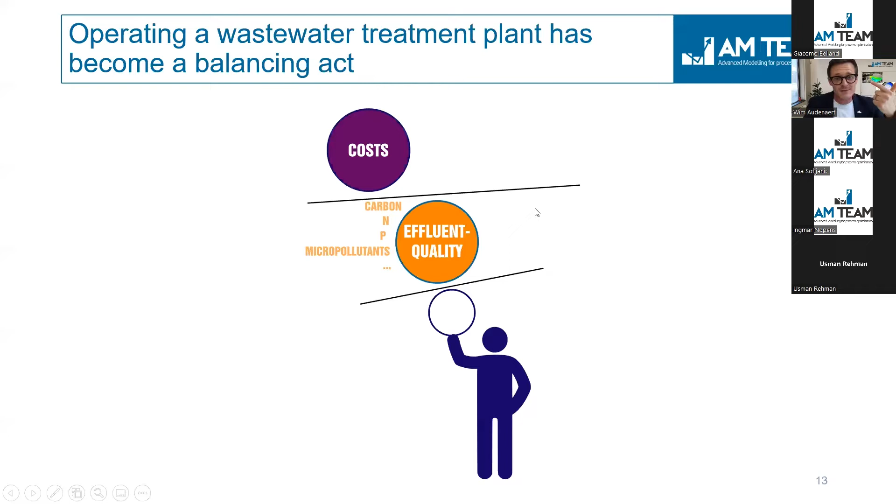You have to balance it with costs. And now we have this third dimension of N2O or climate impact. These three conflict. Not a single plant in the world is a perfect plant with all of them in balance. So the cheapest treatment with limited climate impact and the best effluent quality, it doesn't exist. You really have to balance it. And this makes operating a wastewater treatment plant today a bit more complex, and it makes it a balancing act.

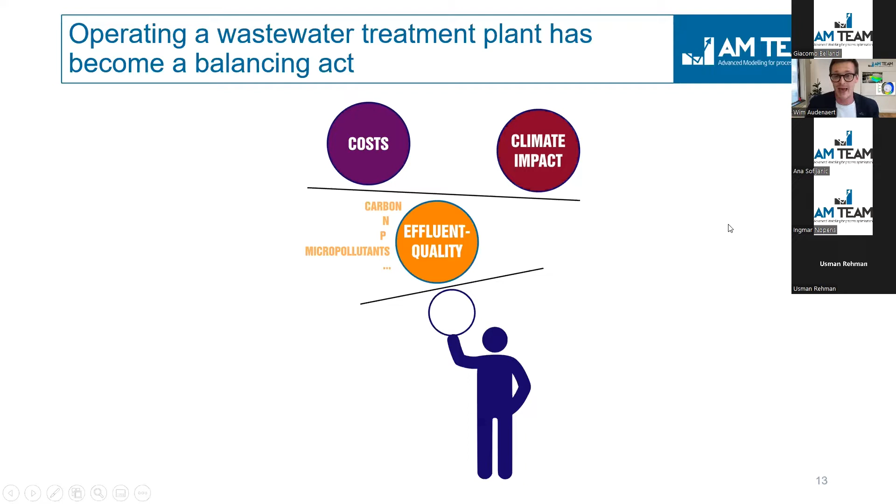So why is N2O important? Well, I should probably not introduce this. N2O is approximately 300 times bigger, let's say, when it comes to climate impact compared to CO2. So this delivers some interesting key figures. Wastewater treatment, if you look at the global carbon emissions, accounts for approximately 3% of that. If you only look at N2O, it is a big fraction of this.

And in fact, N2O, including the drinking water and reuse industry, accounts for almost 30% of the industry emissions. So it's a big issue, right, if we want to lower our footprint. N2O can increase the wastewater treatment carbon footprint by up to 80%. There are several papers on that. Where is it coming from? I think most of you are also familiar with it. It's coming mainly from the biology. There are a couple of other sources, but anoxic zones, aerobic zones, biological nutrient removal.

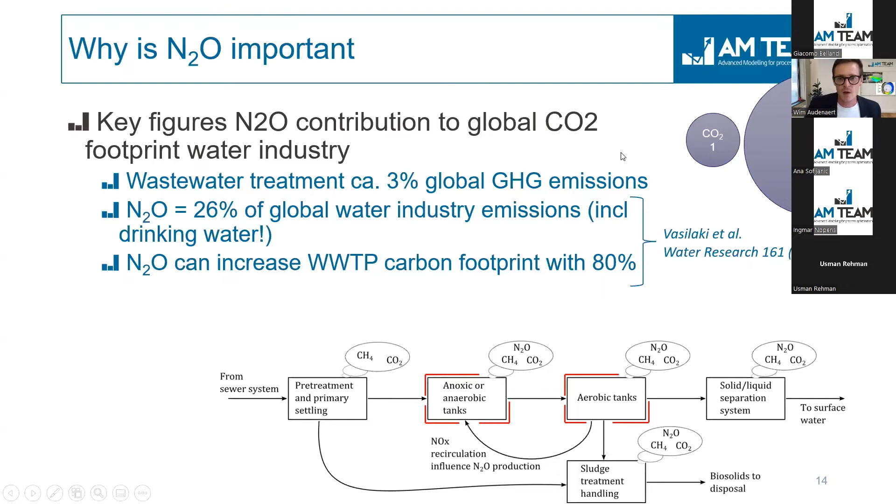What are the questions then? If you go back to this poll, what are the main questions in the market? We have broken it down into two big parts. The first one is, how good or how bad are we doing? How severe is the N2O problem? That's assessment. Once you have done an assessment, you can mitigate. What are the questions with assessment? Well, how is the N2O emission at my plants? Which ones are the hotspots? How do I actually prioritize? And how do I adequately do an assessment of this N2O emission? Because it's very complex and it's not easy. We will come back to that in this webinar.

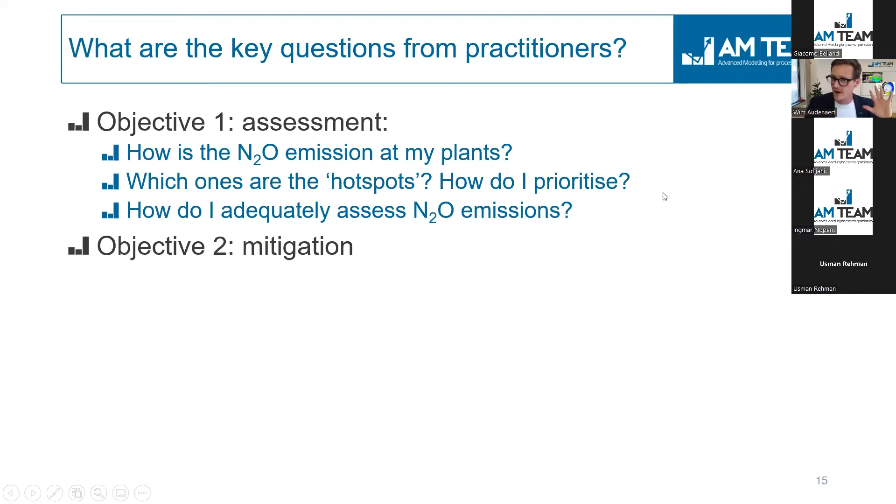Very important questions. When you look at mitigation, well, what are the strategies on the market that exist to mitigate? Probably it's very plant specific. So the question is, what is most effective for my plant? And how do I mitigate N2O without compromising effluent quality? Just remember this balancing act. And what are the generic learnings every utility can apply over and over again? Many questions we are looking for.

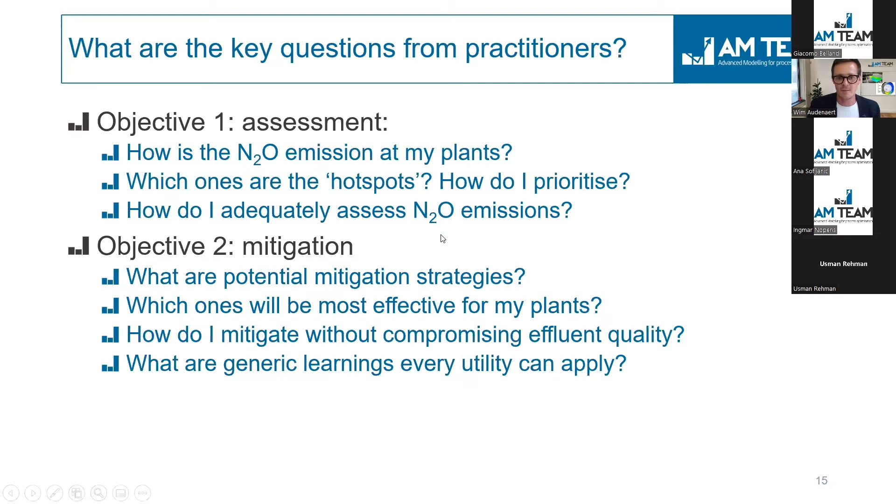A recent post by Watercare Services, which is a utility in New Zealand. This is a post from last week on their LinkedIn channel. N2O is not a laughing matter, they said, right? But if you read a bit more in the post, it's all about the challenge. It's really, how do we get the answers? How do we adequately measure it? How do we find the answers we need?

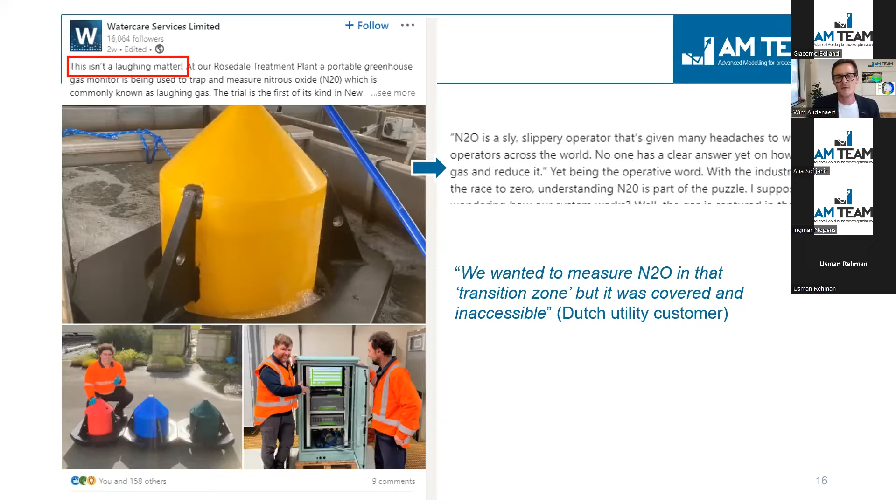We were talking with a Dutch utility customer last week, and they said, we want to measure N2O in that transition zone, for example, a zone between an aerobic part and an anoxic part, but it was covered and inaccessible for a sensor. There are really many limitations and black boxes when it comes to N2O assessments. So with this introduction, I will give the floor to Ingmar. He will be introducing the N2O topic more.

Okay, thank you, Wim. So indeed, I will go a bit further on where exactly the nitrous oxide is produced. Wim already highlighted that you have different microorganisms that are doing different conversions. And usually it's actually under, let's say, extreme conditions. What do I mean by that? When there's actually a metabolic imbalance. So for example, if you have high levels of oxygen or low levels of oxygen or high levels of nitrite or ammonia, that's typically when the pathways for N2O production are triggered. And what we will show here is that this can happen and actually happens in most of the bioreactors.

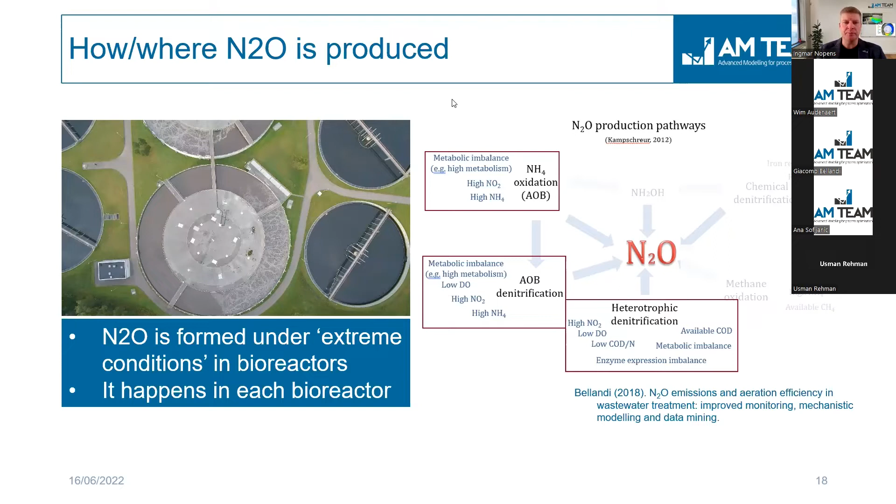So what is driving the N2O production? Well, you have several parts that have an impact on that. First of all, you have your influent that has a certain load, a certain quality, and a certain quantity, a certain flow rate, which is not fixed, it's varying in time. Then you also have the type of the reactor. You can have different types of reactors, different processes, and different process designs. Also, that will have a different impact on the N2O production. And then you have the operation, which is typically going to be, for example, set points of oxygen, etc., or cascade controllers. So all these things will have an impact on the amount of N2O that would be produced.

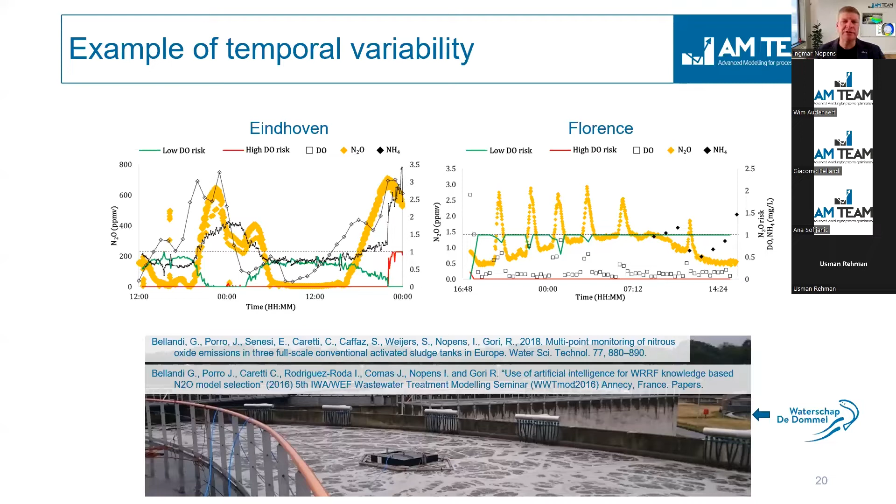So let's have a look at some evidence of this temporal variability. What we see here are some pictures from two papers, and the references are shown below, where measurements of nitrous oxide were performed during the course of one day. You can clearly see, N2O here is represented by the yellow symbols, that it's not constant in time, it's varying in time. But also you cannot really see very clear patterns. There are some patterns in there, but it's definitely not going to be completely fixed.

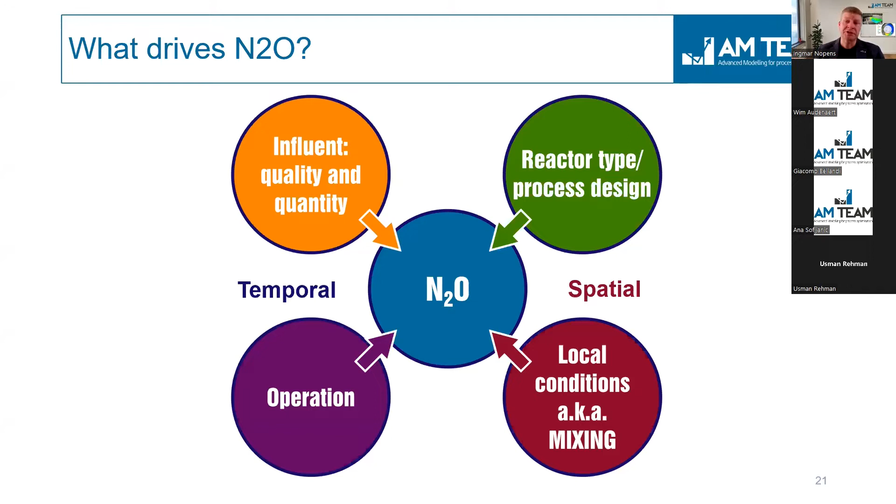So one thing that we want to also add to this, next to the temporal factor, is actually the spatial factor. We have seen, or talked about, these metabolic imbalances caused by some extreme conditions. And actually the fact that a bioreactor is not a completely stirred tank reactor, as we will show later, means you can have some of these extreme conditions even in locations where you don't expect it. So we believe that mixing is also a very important topic.

So that brings us to a first key point of this webinar, that basically due to this complexity, it is really hard to assess and to effectively mitigate N2O emissions. We have different factors that have an impact: the influent, the operation, the system type, and the mixing. So this also means that the assessment and the mitigation will also be highly plant dependent.

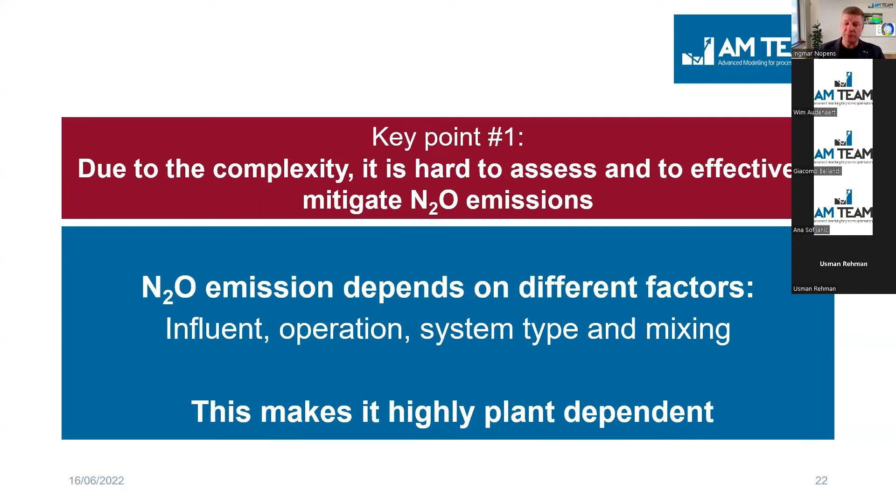Yeah, thank you, Ingmar. Indeed. So apart from all the other things Ingmar mentioned, one of the things was the mixing or the local gradients. So let us dig deeper a bit into the gradients in the bioreactor.

We will start with a very simple example of a coffee cup where you are pouring milk into coffee, and you would expect that it will actually mix immediately. But you know that if you don't stir it very well, it takes much more time to actually completely mix. Which means the gradients, even at that small scale, exist. And by the gradients, we mean the difference between concentrations across the whole reactor system.

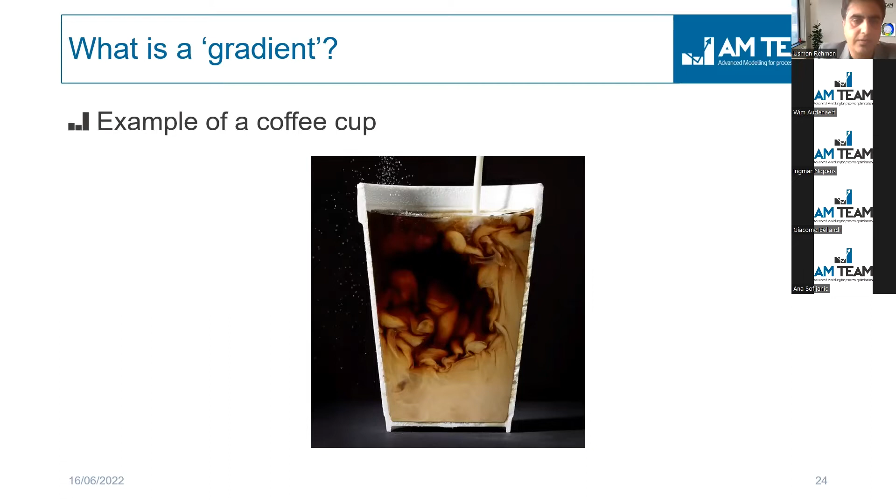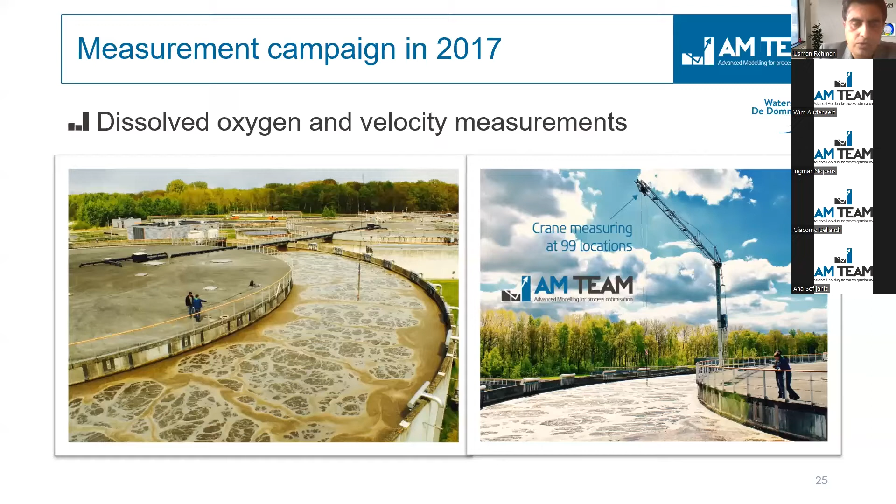What we did in order to confirm this, in 2017, we did a measurement campaign on a wastewater treatment facility in Netherlands, in Eindhoven, using a crane with multiple sensors attached, and we went deep into the reactor to measure dissolved oxygen and also other measurements. But if we go forward in the next slide, we will show how it looked like.

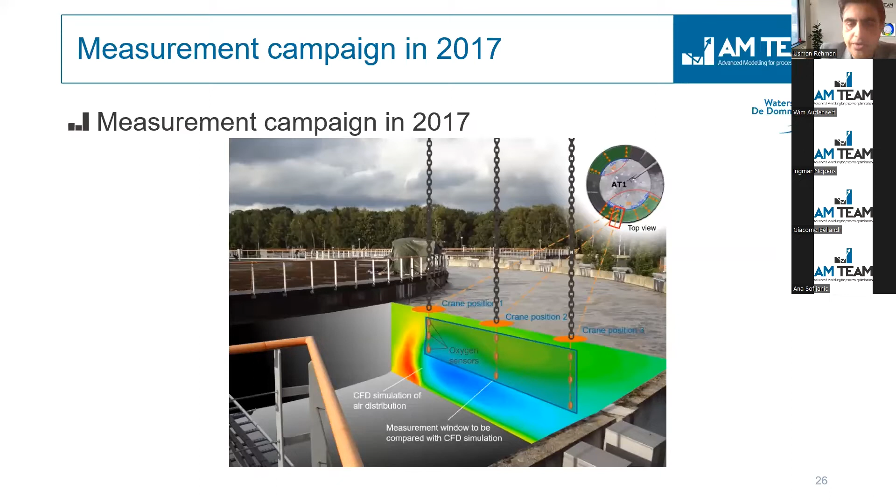So we attached several sensors with the crane, and we went deep inside the reactor, and not only deep, but we also measured across the whole width of the bioreactor. And we observed that actually dissolved oxygen is not really constant, but it's very varying, and it means that there are really gradients existing in such a big bioreactor, even in the zone where the aeration was really happening.

So in this graph, there are two graphs which show two different locations in the bioreactor. On the left side, you see dissolved oxygen across the depth of the bioreactor and the width. The blue color shows the low dissolved oxygen, and the red or green colors show the higher dissolved oxygen concentrations. You can see clearly that there's a 40% difference between the top and the bottom dissolved oxygen concentrations, which is a big gradient at the same location.

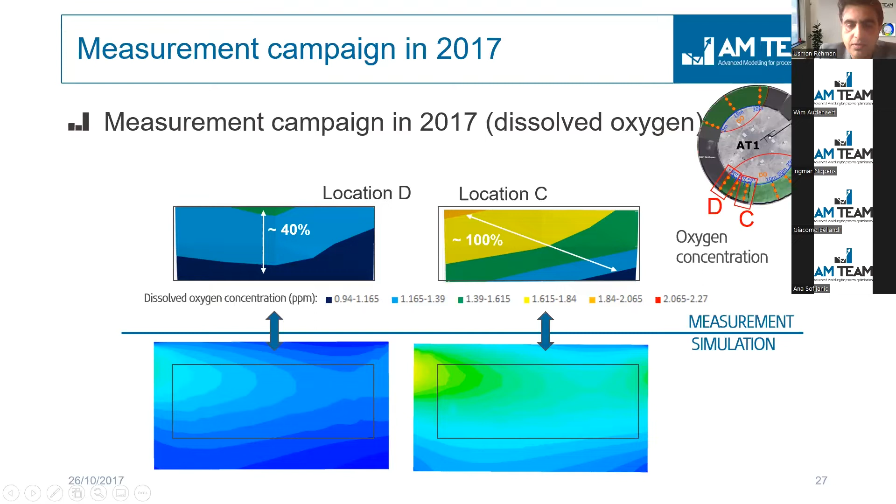And then at location C, it's not only along the depth, but also along the width of the bioreactor, so the diagonal. Oxygen almost gets doubled going from right to left in the bioreactor. This was confirmed with CFD simulations, which showed almost similar gradients arising because of the hydrodynamics of the system in the bioreactor.

And this is not the case only for one type of bioreactor, but this is almost the case for all types of bioreactors.

So it means that it really depends on your system. It really depends on your operations, how you are really operating your bioreactors.

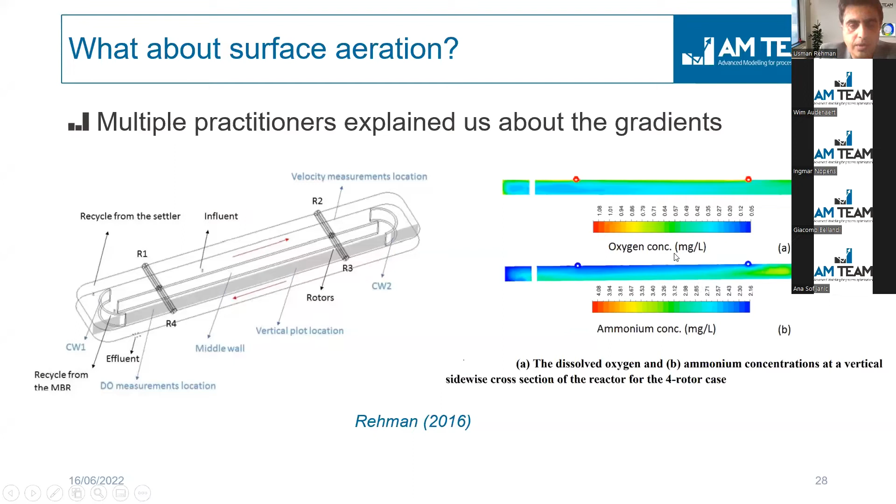We have also done some off-gas measurements to further confirm this. Our colleague, Dr. Giacomo Bellandi, actually did the measurement campaigns in two different plants in Italy, one in Florence and one in Rome. In both conditions, what we did was put gas hoods across the length of the bioreactor and also along the width of the bioreactor, to see if the reaction is happening only along the length of the reactor, or also along the width.

Normally what you would expect is that your influent is coming in from the left and going to the right, continuously causing a reaction, and you would not expect a lot of variation radially or along the width of the bioreactor. But what we observed in both cases was that there was always a difference between location 1 and 2, or location 3 and 4, location 5 or 6, in both cases.

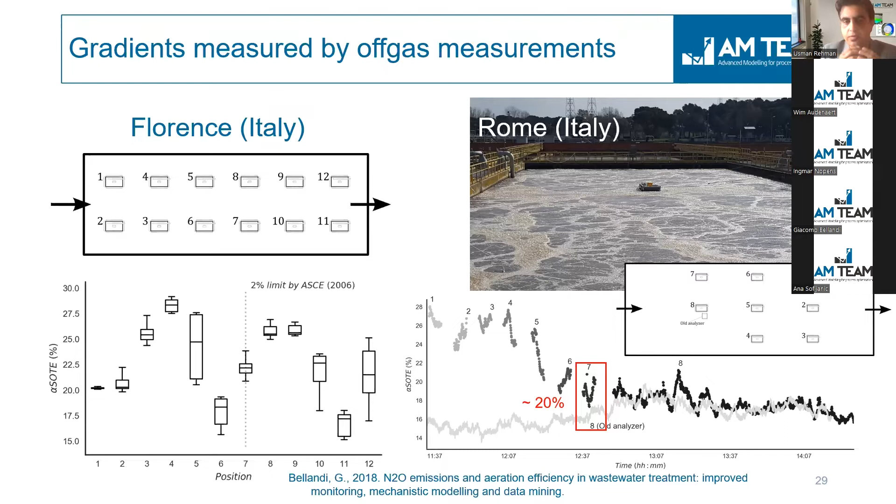For example, in the case of Rome, there was almost a 20% difference between the oxygen efficiency of location 7 and 8, which just tells you that there are actually differences when it comes to dissolved oxygen. Similarly, other variables will eventually have variations in the system.

So this makes things a bit more tricky, because what does it tell you? That we should be asking, where should we be placing our sensors? And once you have put your sensors in a certain location, how would you interpret it? Are you putting your sensor in a good location where you expect a measurement that's representative of the whole system? If not, how would you interpret it, and how would you derive conclusions from your measurements?

But what is more certain is that every bioreactor has gradients. We got to know how we can quantify the gradients, and how we can measure the impact of those gradients on the performance of the bioreactor. It actually varies from one plant to the other, and it also varies with how much flow is coming in and how much aeration you are putting in. So it's really a plant-dependent feature of a bioreactor.

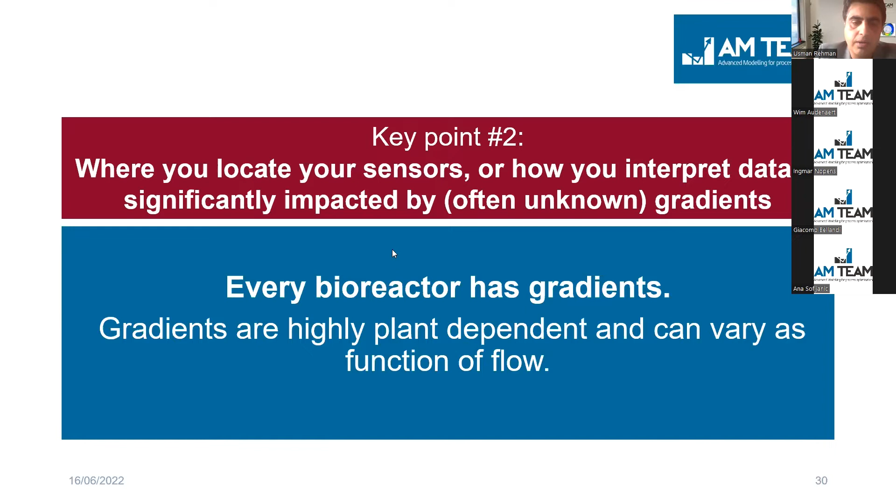So one of the solutions is to look at the mixing, which is about the hydrodynamics, about how efficiently you are mixing your system. But how can you really quantify that? Only by actually connecting it with the biological performance. And that's what we'll try to do in the CFD biokinetic model.

Usman, before we go to this part, we can actually devote some time to questions, because some questions came in. Sure, so Ana, can you maybe read this question? You're still on mute, Ana. Classical.

Thanks, Wim. The first question is, what about N2O from secondary settlers? Is there any evidence of this? We've answered yes, there are certainly studies that have proven there is a small amount of N2O production in settlers, in secondary settlers.

Yeah, and there was one question I have also seen, Ana, and maybe I will go to Giacomo. Which type of sensors did you use in these Italian plants? Okay.

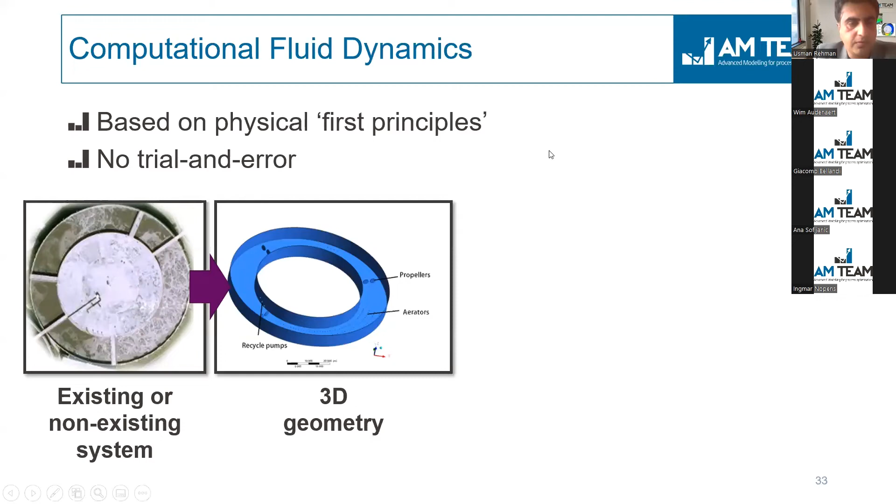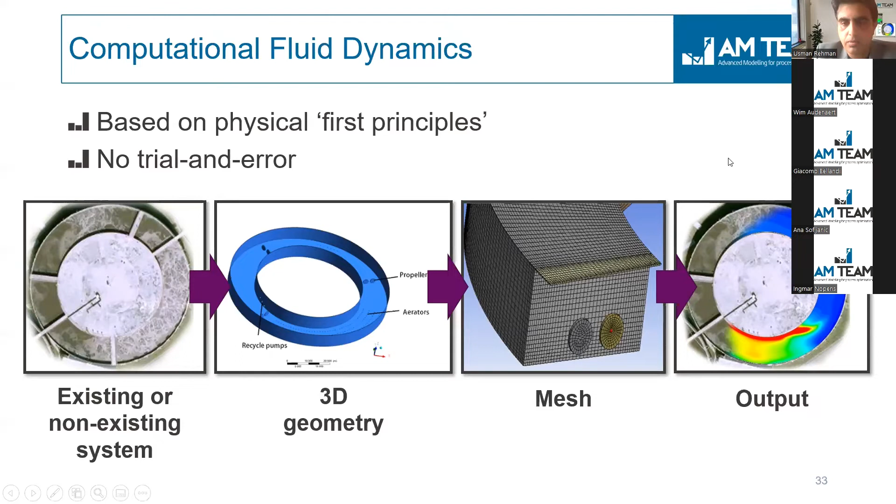We then transform this into very small volumes, which we call a mesh, where we solve all the equations. Based on that, we model it and get a nice output, normally in 3D, meaning you can see it along the width, the depth, and any dimension, as a function of your variables.

But the real power of such a tool comes when you run different what-if scenarios, which is very important given we want to figure out the best mitigation strategy for N2O. You can run multiple scenarios—for example, change your aerator configuration and see what happens. You get a new output, compare it, and assess which is the better design amongst all the what-if scenarios.

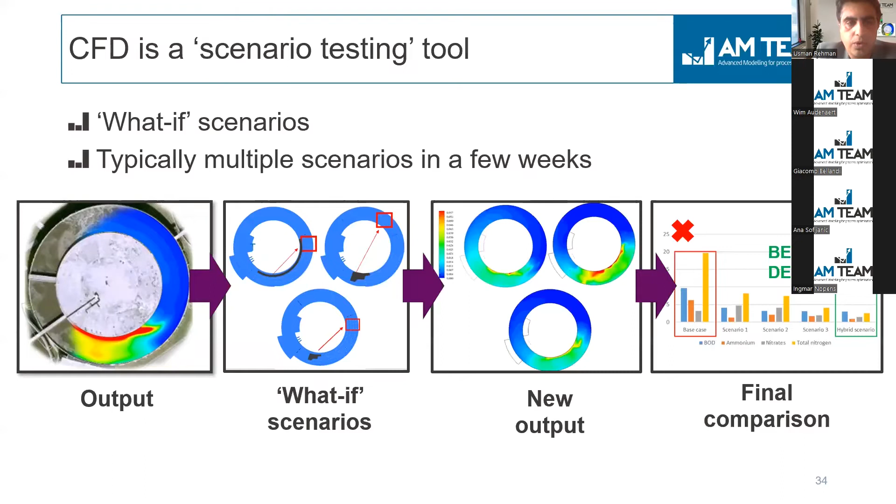So this is a basic understanding of how CFD works. But what we actually do now, to really get to the depths of the N2O emissions problem, is add kinetics into it. This kinetics comes from the IWA scientific reports, which are very famous and widely used in the industry—activated sludge models, ASM1, etc.

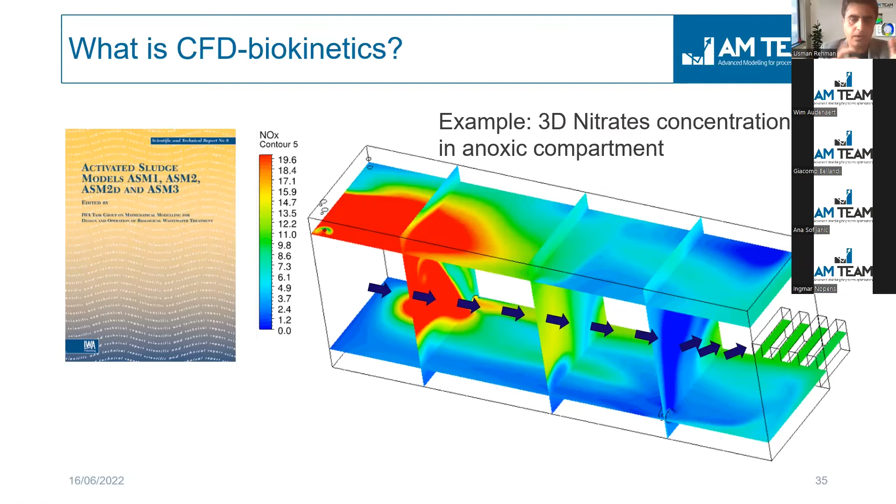By using CFD and kinetics together, you can understand the impact of your design on the performance of your biological system, and then run scenarios by moving your impeller or mixer somewhere else to see if it actually improves your system or not. Okay, so that was me. I think now it goes to Ingmar.

Thank you, Usman. So what else can we learn from these CFD models coupled with kinetics? We've already seen that you can estimate local concentrations of all the state variables in the ASM models, which allows you to evaluate effluent quality, but also energy optimization—for example, if you play with the airflow rate, you can run different scenarios. But as Wim already pointed out, there's a lot of criteria.

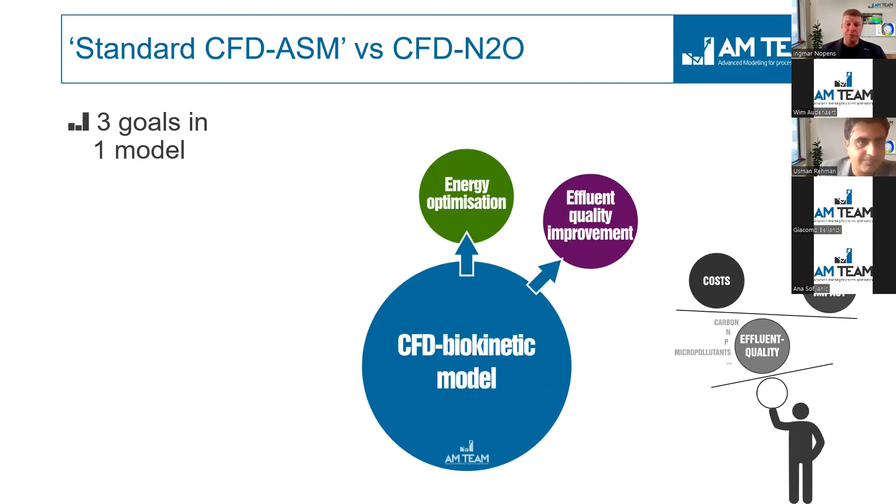It's really a multi-criteria problem, which means that when we add N2O and its mechanisms on top of this—if that is the primary objective—you also get insight into both energy optimization and effluent quality, and can be sure these are maintained. So it's like killing three birds with one stone. Moreover, it's like a 3D X-ray of your system, turning it from a black box into more of a gray box model, letting you see what's really happening under the surface.

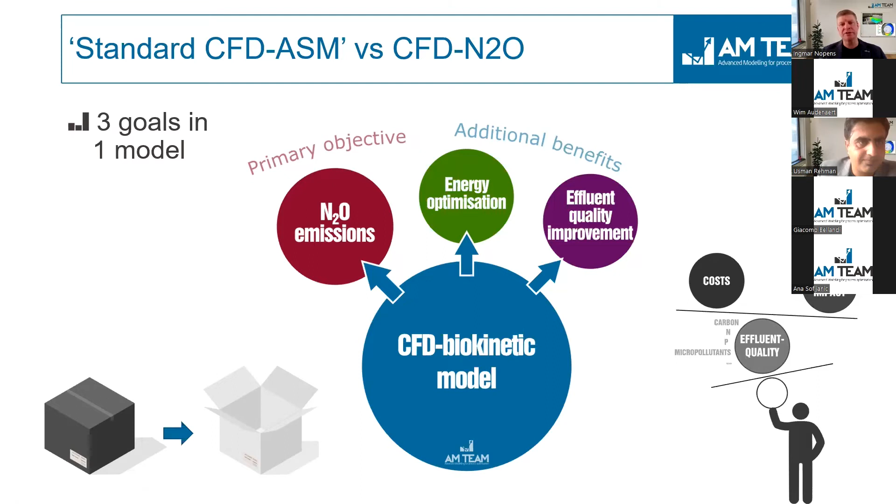Now, a little bit on N2O kinetics—not going into too much detail. Obviously, they are not present in the traditional ASM models published earlier, as mentioned in the STR. But model extensions have been developed over the last decades, putting in pathways and calibrating typically at lab scale. So what we did is take the most important pathways of these model extensions and add them to the biokinetic model, both in terms of stoichiometry and process rates.

That allows you to make local predictions of all the relevant species that have an impact on the generation of N2O, and of the N2O concentration itself. If new kinetics are developed, they can easily be added, just like adding more mechanisms and species in a Gujer matrix, as we're typically familiar with.

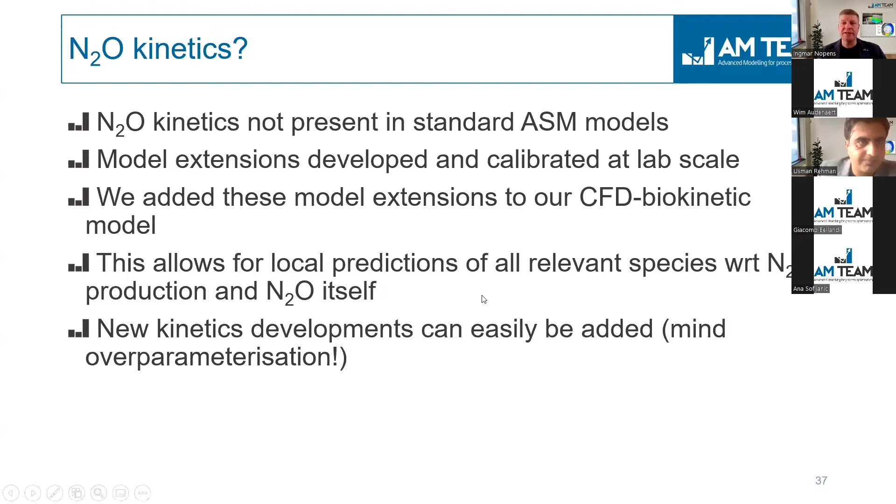One thing I'd like to stress is that you should also mind not over-parameterizing your model. You can add a lot of mechanisms, but at some point, if you have limited data available, it becomes very difficult to calibrate those models.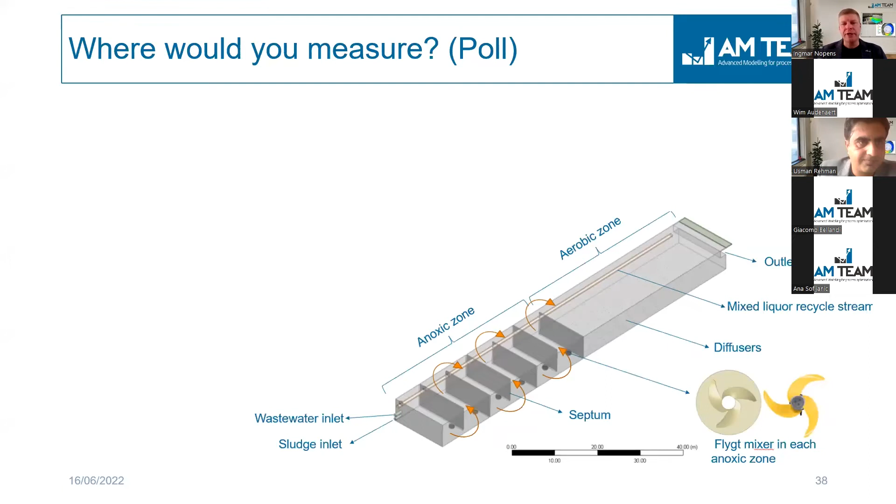The poll question is, where would you actually start measuring? Would you measure at the start of the anoxic zone, at the end of the anoxic zone, or in the aerobic zone? Would you have a preference on how you would design your measurement campaign? You also have the option of all of these locations, or 'I have no idea' - that's also a fair answer.

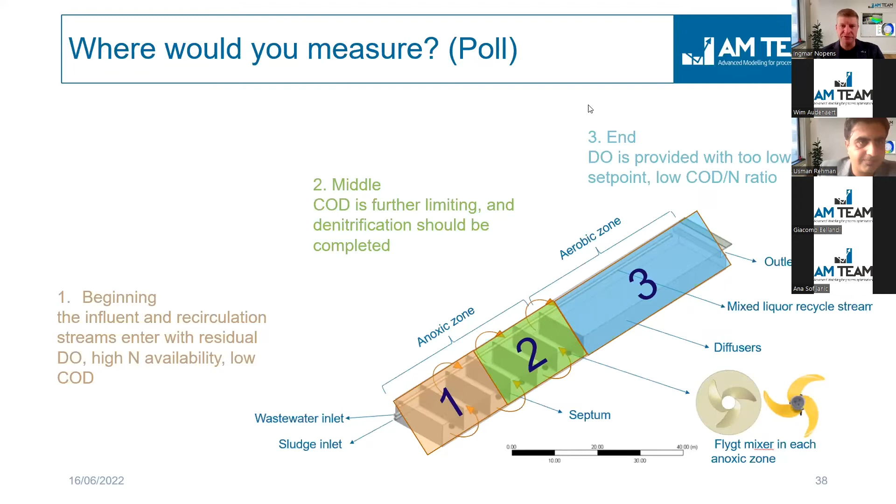Okay, let's have a look at the results. So the winner is all of these locations - that's obviously always the conservative or safe option, because then you will get to know everything. But interestingly, the others, like the aerobic zone, are also quite popular, and then at the end of the anoxic zone.

Let's continue and give a little insight into what actually comes out of this model. Here you can see the N2O production rate in the different zones. We are now looking at the top view of the reactor, like a horizontal slice. Left is the anoxic zone and right is the aerobic zone. The base case is a base case with a certain airflow rate.

What we can see is that in the anoxic zone there's not too much going on with respect to N2O production. In the aerobic zone it's also fairly limited, and it's actually at the end of the anoxic zone where we observe quite a bit of N2O production. The reason, which you cannot see from here, is because there's a backflow of oxygen from the aeration zone into the anoxic zone. So clearly a design issue is causing this.

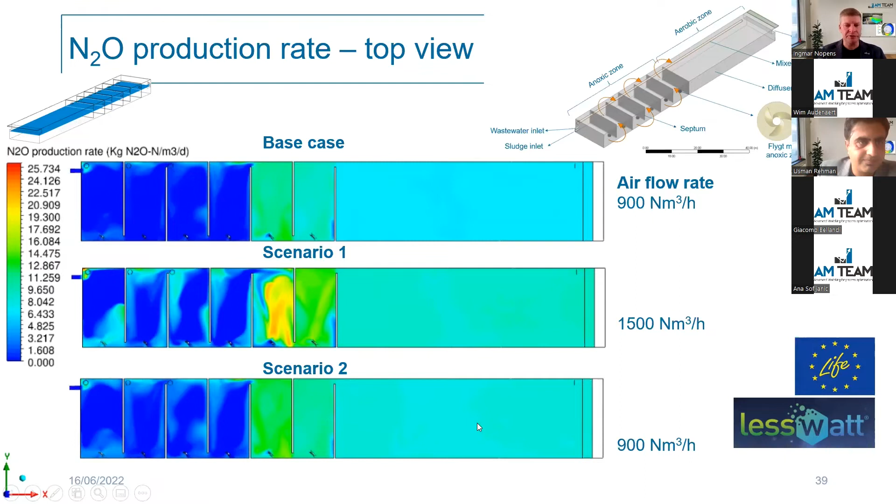In the middle figure, you can see a different scenario where the airflow rate has been increased in the aerobic zone. You can see that this further emphasizes or increases the N2O production in the anoxic zone. The lower figure is again at the same airflow rate, but now at a different load, illustrating that the load also has an impact on the N2O production.

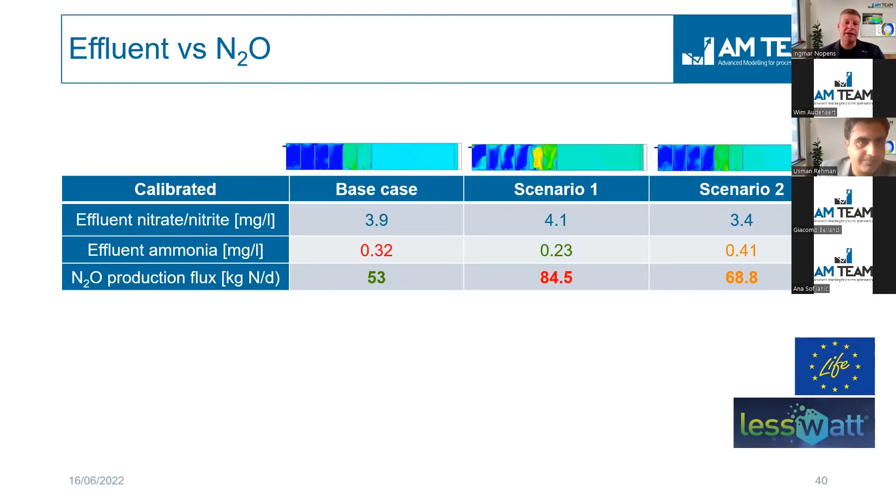From these simulations, you get observations of not only the N2O, which I discussed now, but also you can see, for example when you reduce the aeration rate, what the impact is on the effluent ammonia, to keep an eye on that, and also on the nitrate concentration. You can see that these can be very different in terms of N2O production, even if your effluent is not really affected by the changes you have made.

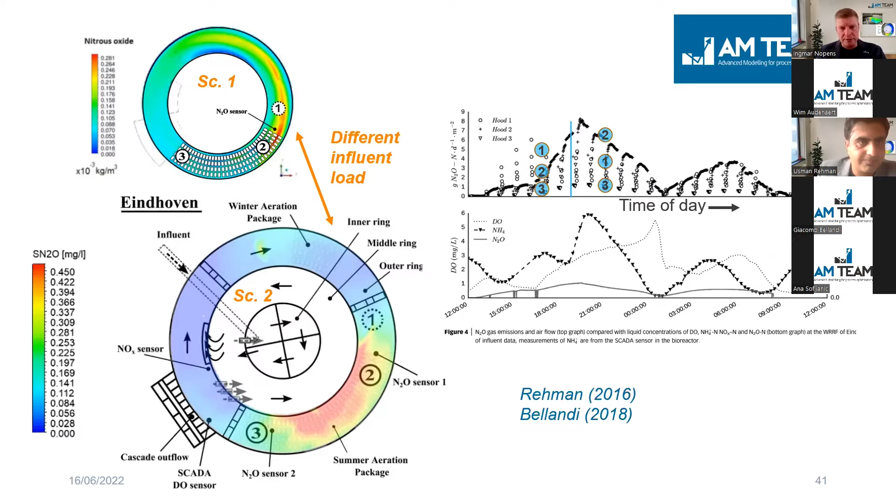So the next slide brings us to the third key point: the CFD with the integrated kinetic model, including the N2O kinetics, is a powerful assessment tool. You can observe or evaluate where in your reactor and to what extent N2O is being produced, and it could also help point you in the direction of mitigation strategies. The CFD biokinetics visualizes the concentrations in 3D as a function of the plant design and operational conditions. It's, as I said, kind of an X-ray of your system.

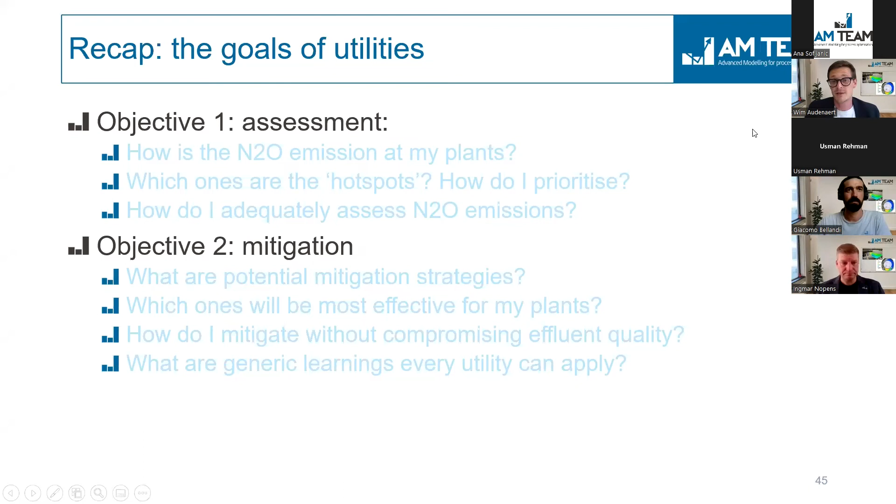Well, if we talk about the assessment stage, many utilities worldwide are currently doing that because it's important. You want to map the flux or the mass of N2O in your plant under various conditions. Many people are now engaging in measurement campaigns, and definitely there, if you look at this, probably this tool can help a lot with deciding where to measure, how long to measure, where to put the sensor, and things like that.

And as Ingmar has shown, these zones also shift. So it's not that this zone always has low N2O emission. It can shift. The thing is, if you have some experience with N2O, 2 years or 3 years of measurement experience, you might start seeing patterns there and you might start avoiding such things.

But here's the thing, internationally, so many utilities have to start with measurement campaigns. The question is, should we really go through this trial and error based measurement campaigns? We can definitely do them very smart. So this is one point I wanted to address here.

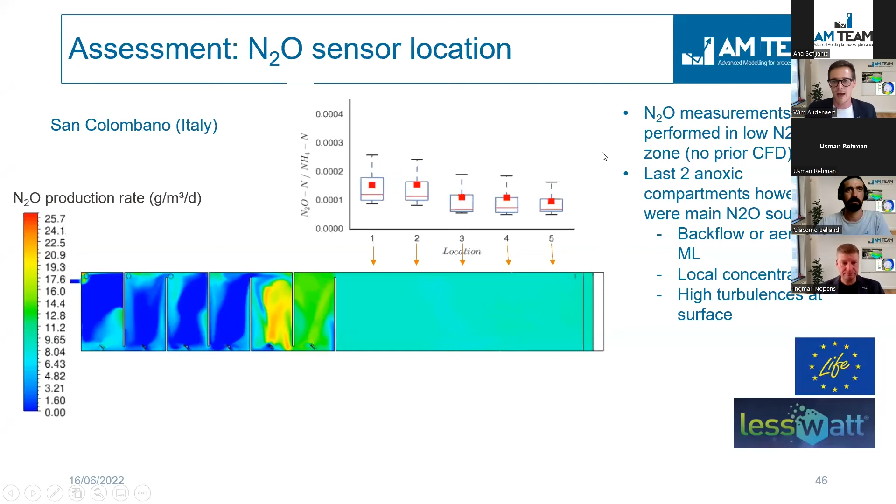In this specific plant, this is again the top view, it had to do with local concentrations and local turbulences, local mixing conditions, causing the pattern. Again, we will not go into detail, but it's very plant specific what happens. Okay, so this is the sensor location.

A second part of assessment is, if you are measuring, how do you process your data and which learnings do you extract from your data? Typically what has been done is you have a couple of sensors in the liquid phase, for example, at 1 or 2 locations. The people from Unisense are in this webinar as well. And you put them in your plant at various locations, and probably what you are going to do is correlate these measurements with other measurements you have from your plant, dissolved oxygen, ammonia, and maybe other measurements.

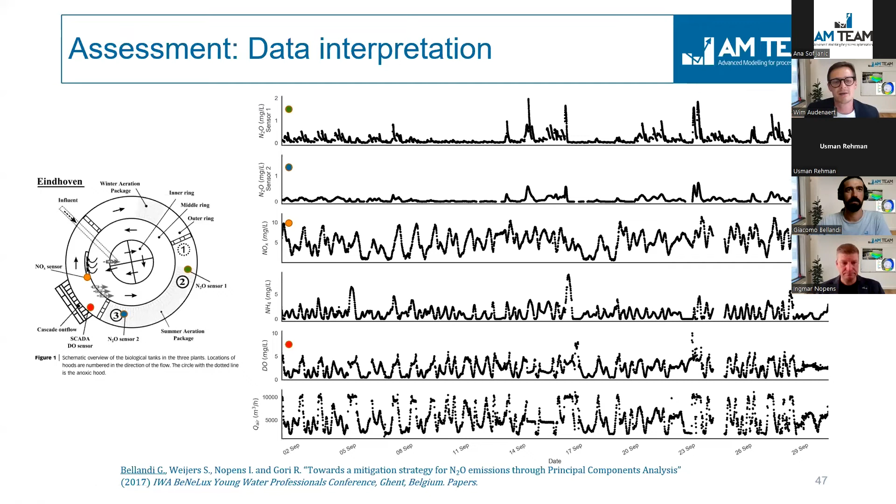The thing is, it's very tricky. I think if you have seen these gradients and the simulations and the local conditions, it's very tricky to start correlating this data and make sense out of it. We have seen in the question of Ingmar that extrapolation within the same plant to other conditions or extrapolations to other plants, that's a very, very big challenge. That was the biggest challenge in this poll. And this has a lot to do with it. So it's not that the measurements are not valuable, but it's very helpful if you know what's going on. So that's the assessment part, sensor location, data interpretation.

If we go to the second part, the mitigation part, of course, CFD, as we have shown, is a tool that allows what-if testing, right? It's something you cannot do with any measurement. You have actually a model of your plant, and the benefit of a model is you can start playing with it. You can start testing measures. And then you can quantify how the N2O flux in your plant is in the 3D space. For example, grams per cubic meters per day of emission.

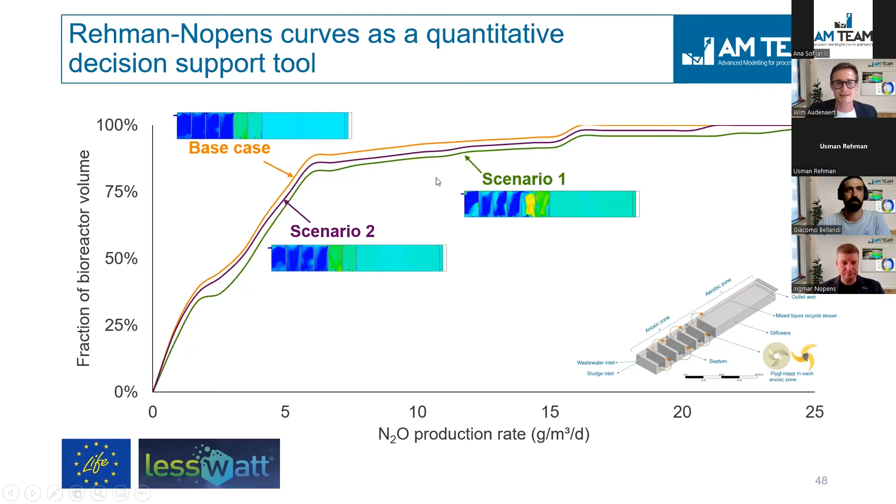So yeah, what can we do? Because that's also a big debate. Many countries are building experience. We have seen that people in Denmark are, of course, very active. In the Netherlands, there is a big focus on that. UK, Australia, and many other countries are focusing on it.

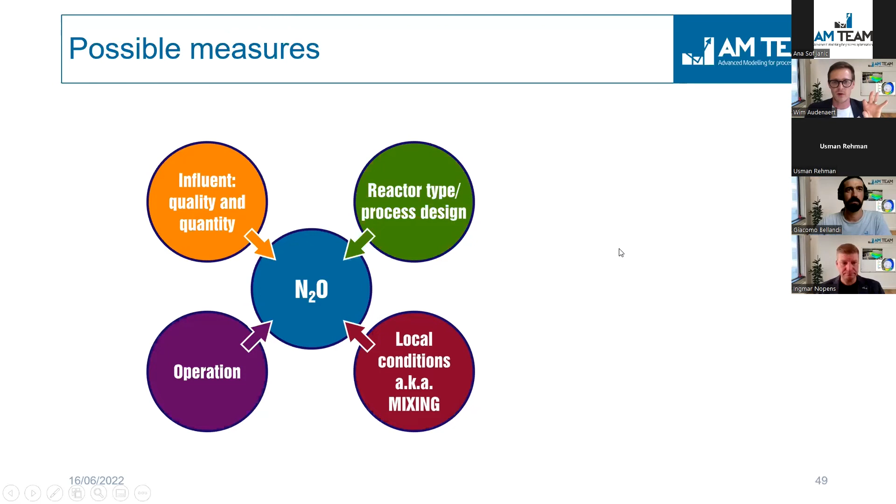This is the same figure again with the 4 drivers of N2O. Well, a very popular one is to look into aeration, maybe to lower the DO set points. But of course, you will only do that if you don't compromise effluent quality. That's an important one. So here the question again is, if we do something about the aeration, what is the impact on the mixing? Because aeration is also mixing. And what is the impact on my effluent quality? So it's not that straightforward.

On the other hand, if you're retrofitting, for example, you can do design optimizations, but in many plants, it's not easy. Or you can test other strategies, for example, alternative aeration strategies. With Air Liquide, we are now starting up 2 projects to test and compare pure oxygen versus just the regular aeration in plants when it comes to N2O.

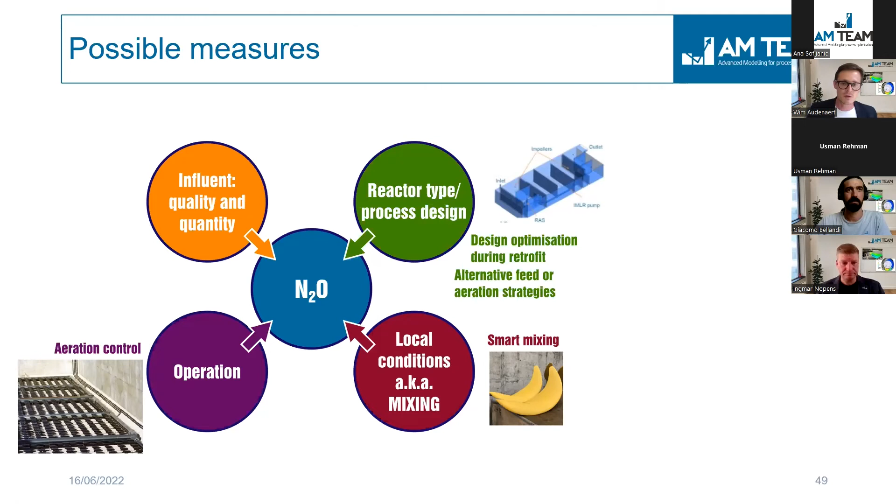And mixing, of course, is a big topic. We have seen that over and over again. Switching on, off mixers, moving a mixer has a huge, huge impact, often underestimated. The bottom line is, what we see here, it's all about minimizing the N2O production volume.

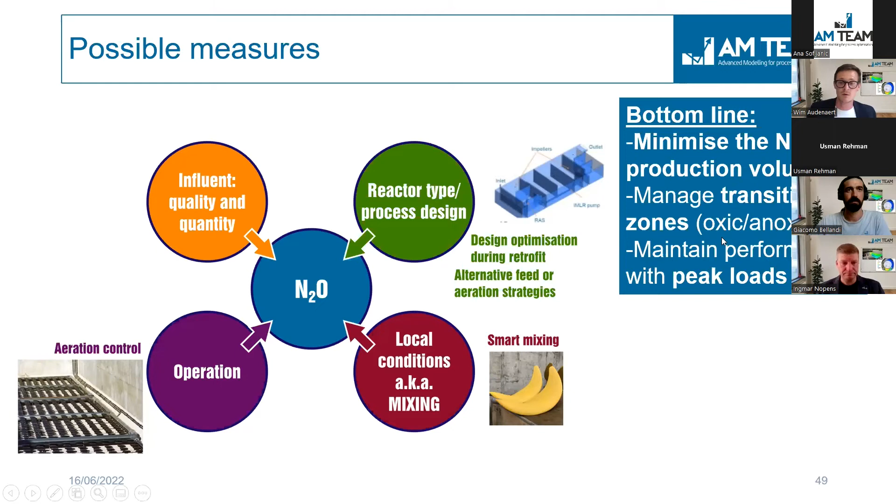So we look at N2O in a 3D perspective and see it as a big red cloud or several clouds that shift across the plant as function of your operation. And you really have to minimize that volume. So by managing transition zones, oxic, anoxic, avoiding these extreme conditions and maintaining the performance when peak loads come in.

If you look a bit in the literature, our colleague Usman, for example, is doing that regularly. You have certain actions you can take. It's moderate DO levels, not too high, not too low. But yeah, of course, it's not so easy in a full-scale plant. What is not too high, what is not too low.

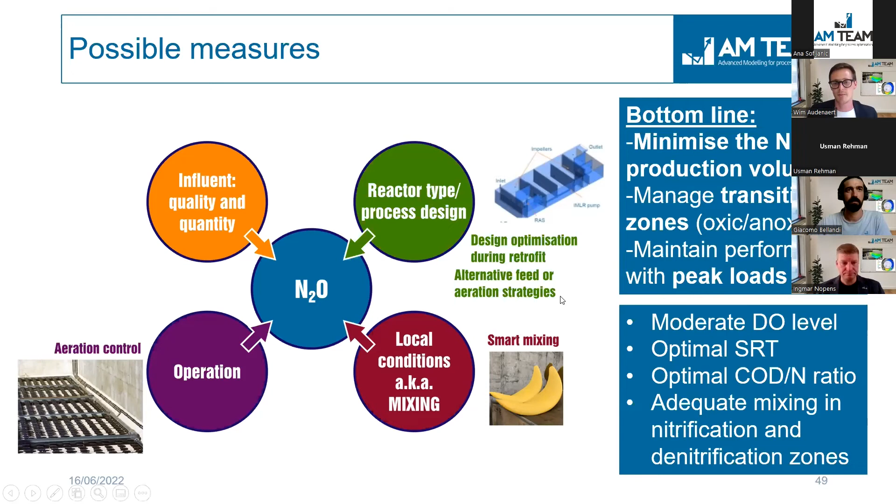People are playing with SRTs, so the solids retention time, COD/N ratios optimal, so definitely not too low, and adequate mixing in nitrification and denitrification zones, because in both N2O can be produced, and also the transition zones between them.

So what we typically do is we work in steps, and one of the core purposes of this webinar was also to show that this tool is a practical engineering tool. Many people from past experiences, like 10 years ago, think CFD is not really a practical engineering tool. The thing is, nowadays computers are very strong. We have applied this model, I think, at around 100 plants.

This CFD biokinetic model, it's really a routine exercise, and you can really have first valuable results after 2 or 3 weeks in such a project, and it includes intermediate meetings and things like that. We typically apply the Pareto principle. The question is, again, do you really have to test or simulate every condition in your plant? Maybe you should start simulating the 20% of conditions that cover 80% of the time.

And that will already give you a very, very good analysis, because that's phase one, the assessment of your current plants. Of course, along that, we also can help combining with the measurements, with the data processing and interpretation, going alongside measurement campaigns. Because don't get us wrong, the claim is not to skip measurement campaigns. We just want to provide additional insights with an additional tool to do them smarter, and to also make more sense out of the data that is more generic for your future work.

So these are all things we can help with in the assessment phase, and we already run multiple projects at the international scale on that. Then, of course, that's the most interesting part. When you have the model, you can start testing mitigation strategies. This is not possible with measurements. For example, what if the flow rate changes? What if we reposition some mixers?

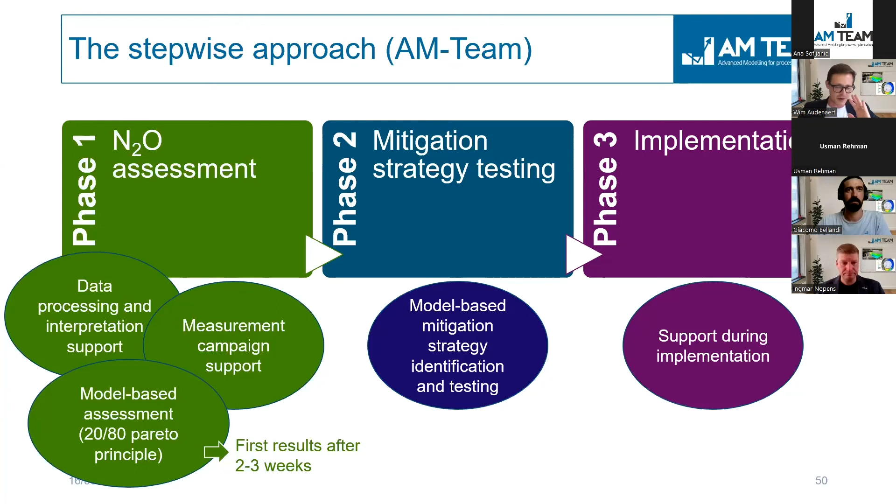And then when you finally implement mitigation strategies, many utilities will still start measuring, of course, because you want to see the real impact on your N2O emission. Still then the model is there because new insights come, it's on standby, and we can still run additional simulations to help that further. So this is a bit how we break it up. And the thing is, it can really start small, and then you gradually build up because it's plant specific. Okay. Before we go to the conclusions, I'm not sure if there are any questions left, Ana.

Yes, we have 2 more questions left to answer live. One is for Usman. It goes, I've had experience of blending CFD and kinetic models in the past, for example, predicting denitrification in FSTs. My experience was that the runtime for these simulations was very significant, and costs prevented us from extracting much value, i.e. running any more than just a handful of scenarios. Is this still the case? Usman.

I think if you look at the technology now, the computer power which is readily available, you don't even need a supercomputer to run such a simulation. A pure CFD simulation has, let's say, six or five equations at best. On top of that, depending on which model you're using, for example for N2O, you will have around 15 to 17 extra equations.

But we don't see a significant increase in computational time because of the extra equations, just because you have much more powerful computers and CPUs now. And especially with GPU acceleration, simulations can go much faster.

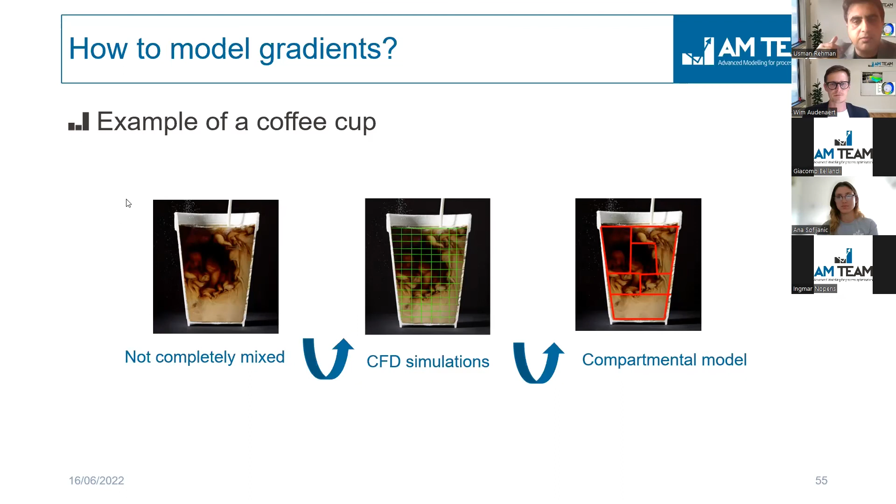Yeah, indeed, the transient or dynamic simulations are perfectly possible. But what we need to see, as Wim also mentioned, is the Pareto factor: by doing 20% of the work, you actually get 80% of the picture of your system. What we have done in the past, and what we see, is pretty much sufficient, and also very practical and pragmatic, is doing snapshots at different moments. So not running one simulation and saying this is representative, but rather taking multiple snapshots across time and assessing the dynamics and their impact on performance. In that case, it's like a few hours of simulation, and you can run multiple scenarios with varying conditions.